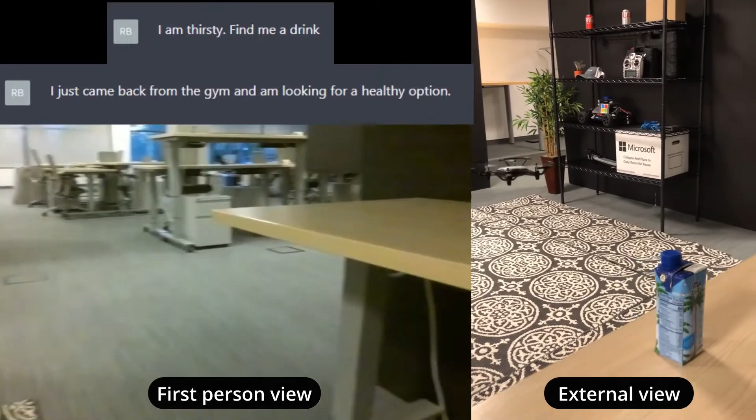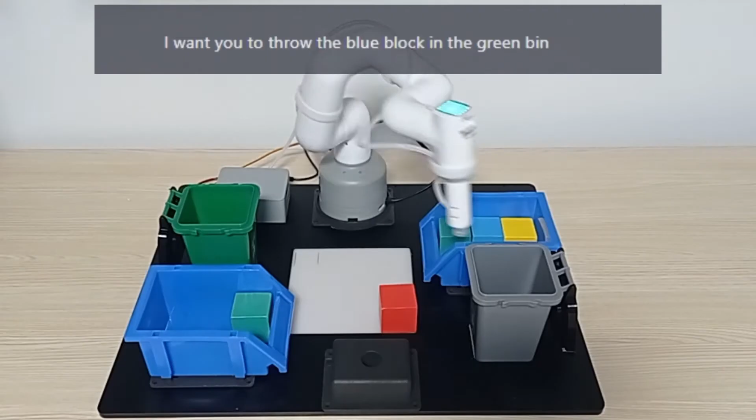The barrier for entry into the field will be reduced, allowing people to easily communicate with robots through high-level commands, while monitoring how well the robots perform during the testing phase. OpenAI released ChatGPT plugins where anyone can add helpful tools to turn ChatGPT from a regular Joe to Super Saiyan mode. We can expect some of these plugins in the near future to help you connect to embodied agents, which can do tasks in the physical world.

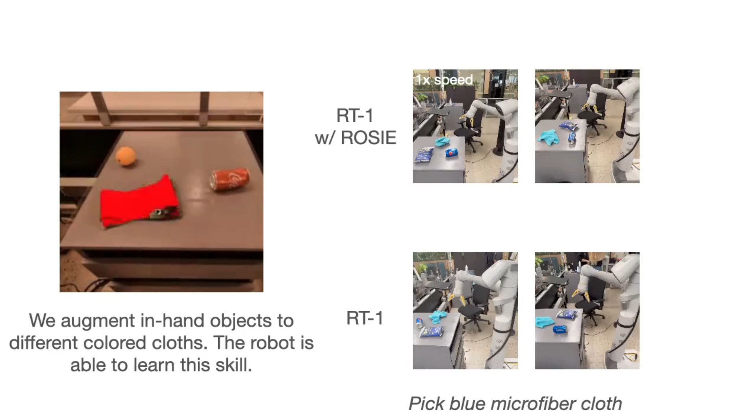GPT-4 came with eyes for images. Soon, it will come with legs, hands, or wings, depending on what you need it for. The next breakthrough project comes from Google's AI labs. They have made advances in robot learning that show promises in a variety of robot tasks and can generalize to new scenarios. This is a game changer for the robotics industry.

Let me explain why. One of the fundamental reasons why robots learn skills slowly is the lack of diverse data. It's like asking someone to learn to play in the NBA after only practicing in a few games. Now, that's a recipe for disaster. The same is true for robots. To be truly useful, they need to learn a variety of motor skills and adapt to different environments.

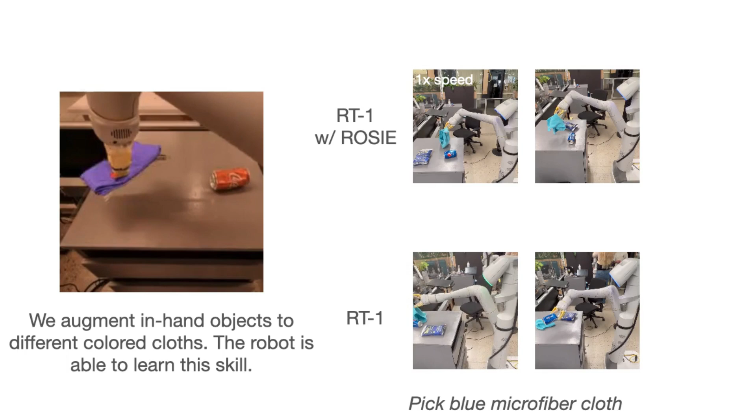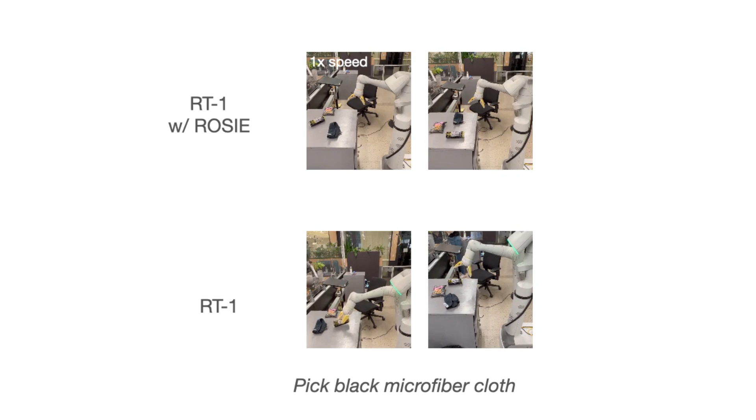In the past, getting large-scale datasets required either a lot of human involvement or a lot of engineering for autonomous data collection. Both of these methods are hard to scale up. It can take many months to get enough data to train your robot. Who wants to wait that long? Enter Google's solution, ROSIE, the latest data augmentation approach that's set to revolutionize the robotics industry.

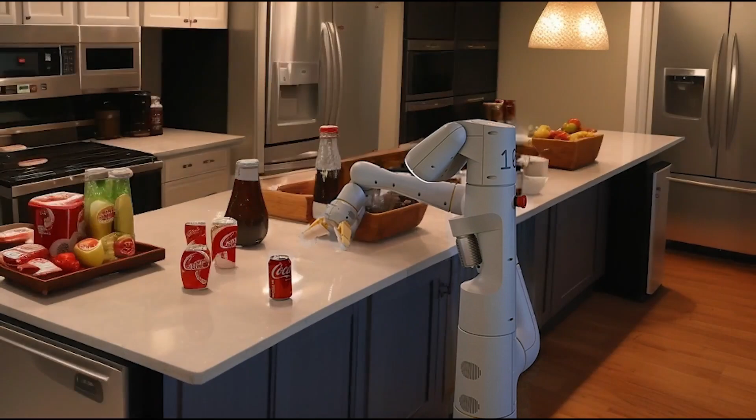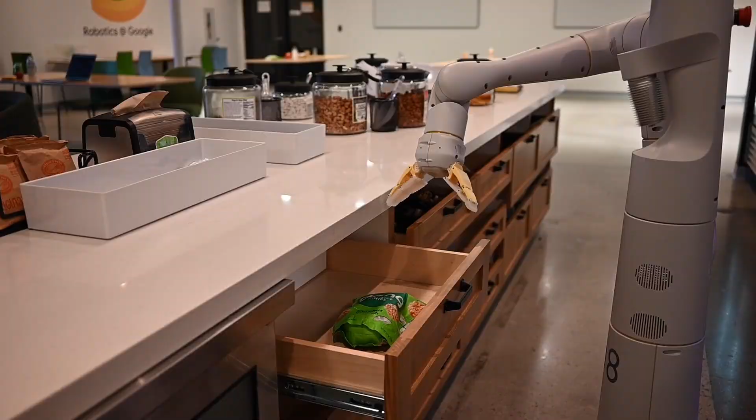ROSIE uses text-to-image models to obtain meaningful data for robot learning without requiring additional robot data. In simpler terms, we can teach robots new skills by using AI-generated images as input to create new scenarios for robots to learn from. It's AI creating data for AI. But how does this work?

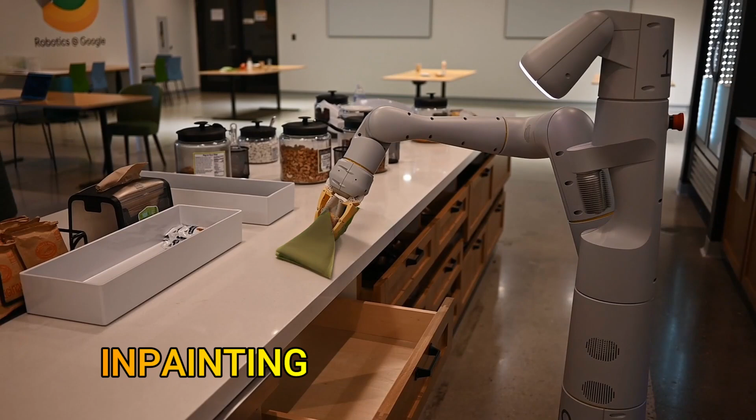ROSIE analyzes scenes from an existing video dataset, identifies areas of the scene that need to be changed, and then uses in-painting to change only those areas, while leaving the other elements intact. In-painting is just a way of modifying specific parts of an image or video. This creates new environments from which the robot can learn. Using our NBA analogy, it's like practicing a few thousand more times before making it to the league.

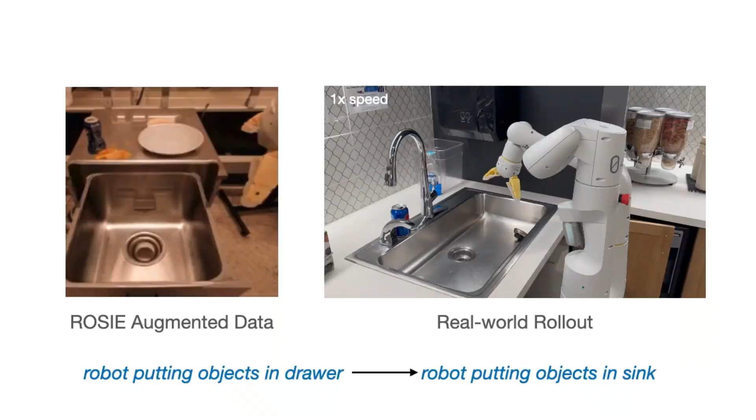Here's an example where ROSIE in-paints a metal sink into the scenes during training, so that during testing, it's able to interact with an actual sink, even though it never actually came across one. This is an imagined experience that helps the robot to learn faster. Talk about bringing your imagination to life. ROSIE uses Google's Imagen to generate the synthetic images for training.

To put into context the importance of this work, it took 17 months and 13 robots to collect 130,000 demonstrations for training. With ROSIE, the demonstrations can easily be scaled up to millions. ROSIE shows impressive results compared to robots trained on less data, outperforming them on all tasks, especially in new scenarios.

The possibilities with ROSIE are endless. We can take internet-scale data and distill it into robot experience. This means that we can teach robots to perform a wide range of tasks and adapt it to different environments without the need for tedious work.

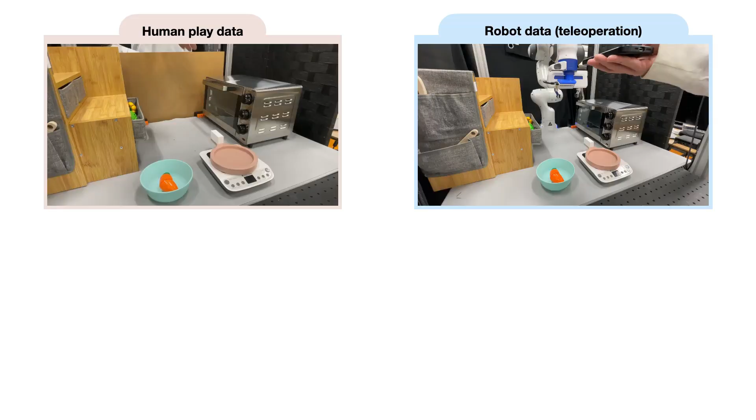Another research project that came out right after this is an interesting robotics application from Nvidia and some top research universities. It was published right after I recorded the initial script of this video, so I thought to add it here since it fits so well with what we're discussing. So the idea is this. In order to teach robots to learn faster, the scientists created MimicPlay.

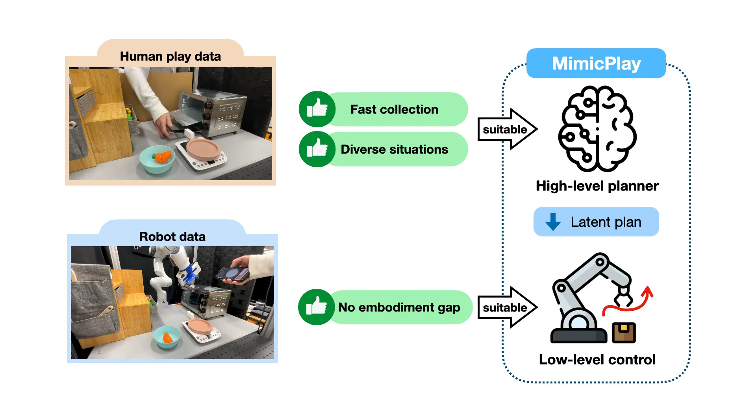This is a way robots can learn faster by mimicking humans. Essentially, the robot observes how a person completes a task and then tries to imitate the approach. The solution is obviously much more complex than this. First of all, there's a visual translation gap between a human hand and its capabilities versus a robot hand.

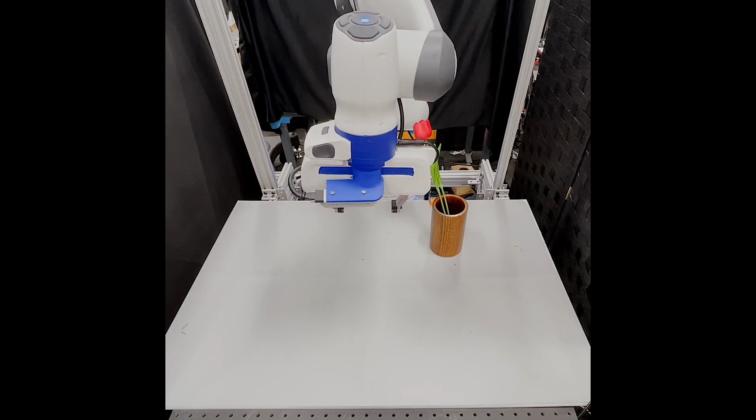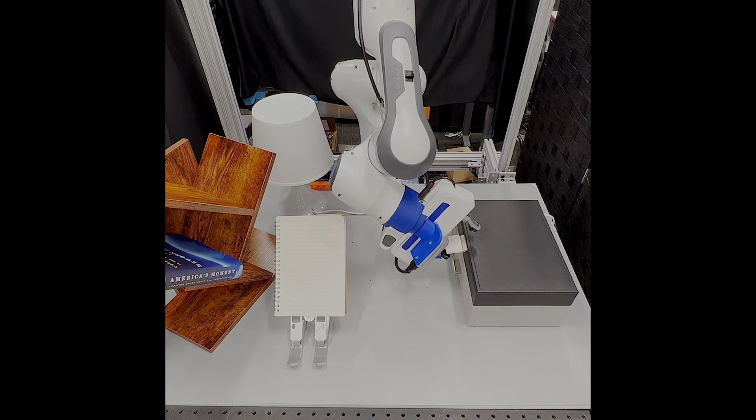In order to help the robot truly understand what it's observing, the scientists operate a robot hand remotely. This way, we're able to help the robot easily understand how to use its robot hand during test time. The advantage MimicPlay has is that we can quickly generate huge amounts of human examples, which helps the robot learn faster. There are other projects like Fish that also use imitation learning in clever ways to help robots pick up on action paths much easier.

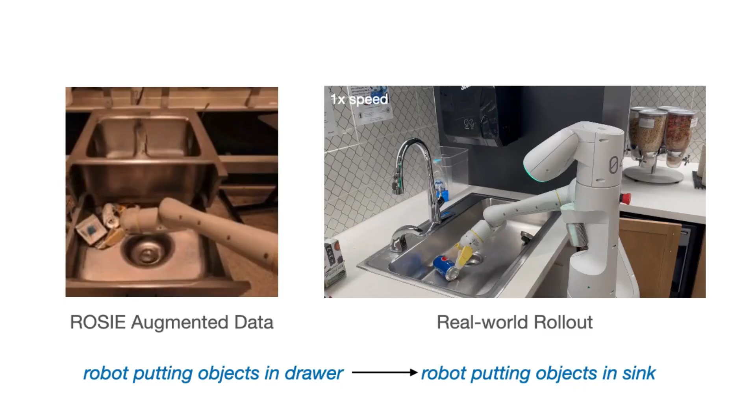These demonstrations may not look like much now, especially if you aren't aware of the real complexities of robotics. But all these examples are innovative ways we can speed up robot learning. The future of robotics is looking bright. ROSIE and other language models like ChatGPT are leading the way in making robots much easier to work with. With more data and higher level code abstractions, robots can learn new skills and adapt to different environments much quicker, making them even more useful.

We're witnessing the beginning of the robot revolution. Who knows what the future holds?